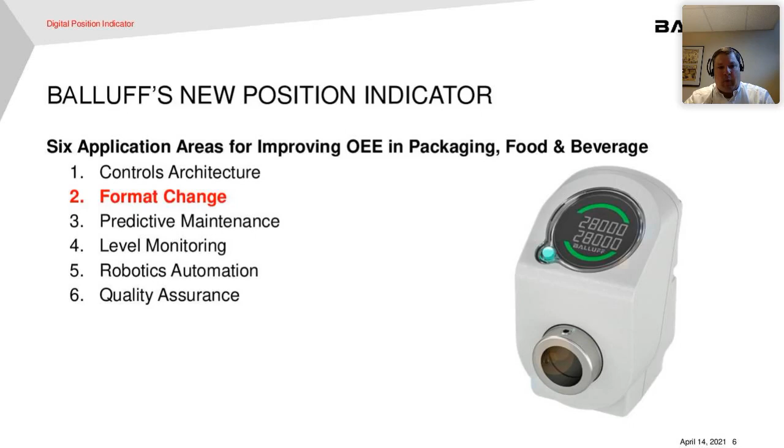In the packaging world, changeover has a lot to do with varying package sizes. So if you imagine you're changing from the big family size jug to a small 8-ounce bottle, there's going to be a bunch of guide rails and different things that need to be changed and moved. That's where we help customers. Whenever we go out and have this conversation about our six application areas, usually format change garners the most interest with customers.

I just clicked on the poll, and 80% of the respondents said that they're using a manual format change system, and that's pretty common with what we hear.

The reason it's been so interesting in these conversations with customers is because there are some trends in the industry driving the need to automate. Customers, or consumers, are really demanding more options. They want more package sizes, more personalization. One of the things we hear about a lot is lot size one. It's really driving manufacturers to have to do more changeovers, running more recipes more often, which means more changeover.

There's also an aging workforce. The person who's been operating that machine for 40 years and knows what to do like the back of their hand—those people are leaving with increasing frequency. They're being replaced by often younger, more digitally inclined people who need to be brought up to speed quickly, and automation provides an opportunity to do that.

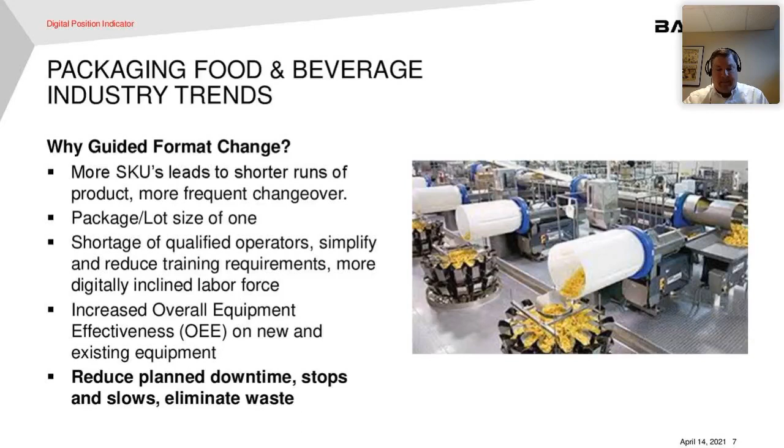Just like in any industry, people are looking to reduce downtime, increase OEE. They're looking for greater efficiency in their plants, not only from new equipment but also from existing machines. So there's this desire for automated changeover.

When people think about automating changeover, they envision changing a recipe on the HMI—you press a button and motors move everything into place. That's a really great solution, but it can be costly, and it can be hard to implement on a machine retrofit.

We often encounter customers, just like we see here, looking to improve a manual situation where they're using unconnected rotary counters, or they have hash marks drawn on the frame of the machine, or they're comparing values with a clipboard and trying to get there manually. And it becomes very mistake prone—there's a lot of opportunity for error.

We have some pictures later of where these opportunities are on the machine, and on machines like cartoners, these adjustments have to be made all over the place. So there's a lot of opportunity for error.

By working with them—Balluff's got a real strength in linear positioning—we provide our customers a measurement device along with visual indication, whether it's on the HMI, or Balluff's got a device called the Smart Light, an indicator light that can provide guidance, and then having IO-Link tie it all together.

We've really been able to help reduce mistakes and reduce the amount of time it takes to do changeover. So now when the operator changes the recipe on the HMI, they still move the devices—the human is still the mover—but the Balluff devices guide them to get to the right position so that it happens more quickly and more precisely.

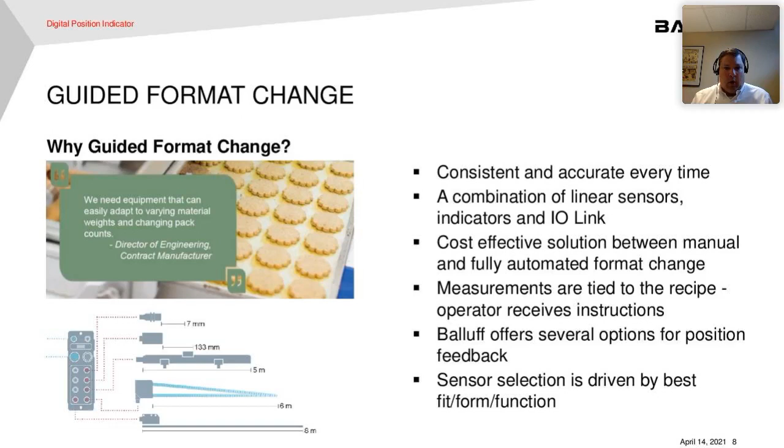For us, it's proven to be a really nice, cost-effective solution between fully manual and fully automated changeover processes. We've been really successful with it, and this is an example of it.

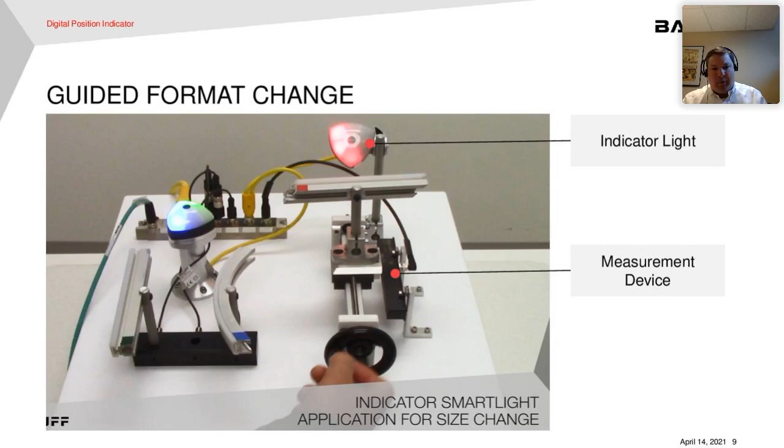We've been successful with it, but customers have been asking us, hey, could you guys get us a digital version of the counter we already use? That's why we're here today. Now we've got it, and we're so excited. It's our version of a digital position indicator. We call it the Balluff Digital Guide, or BDG.

What we have here is a user interface that displays a target and actual value, showing where they're at right now and what they need to get to based on the recipe change. We've got a rotating LED that spins in the direction they need to spin the wheel, then changes color to validate when they get into the target position. If they blow past it, it starts rotating the other way to tell them to go back.

It doesn't run on battery. Power and signal comes over IO Link, but it does have a battery buffer so it can hold position through shutdowns and power cycles. So it's got absolute position. It doesn't have to rehome.

One of the really cool things about this is it's IP69K. That is an industry only for Balluff. We're the only ones with this form factor that has IP69K, full washdown. And then we've got some embedded condition monitoring features, not only for the health of this device, but also that can be used to monitor the health of the machine. We'll get into that a little bit later.

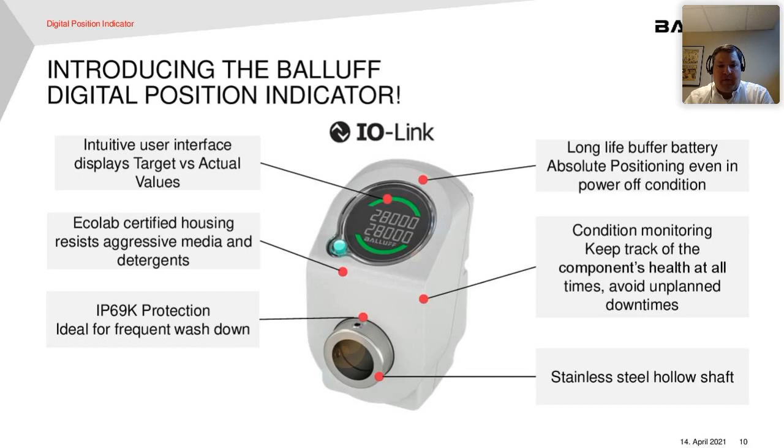This really gives us another tool in our toolkit to address these changeover applications. I think the interface is unique, and the customers that have seen it so far have really liked it. The IP69K is a really nice feature. And these condition monitoring and smart features really open up more opportunities to reduce downtime for our customers.

In my opinion, it's Balluff's position and really our expertise with IO Link that sets us apart from the field. We know what we're doing with IO Link. We can provide a full solution. If somebody wants to improve changeover, we can do the whole thing to help them with it. We've been doing it for over a decade. We were part of the original IO Link consortium. We have thousands of successful integrations we can lean on, and the expertise to back it up. So you can feel really confident that Balluff is going to help you be successful with your project.

Just spending a little bit of time on the smart features that are available. The Balluff Digital Guide is part of a new family of products from Balluff called SAMS, which stands for Smart Automation and Monitoring System. SAMS devices have a standard set of condition monitoring parameters, both for the health of the device along with the health of the machine.

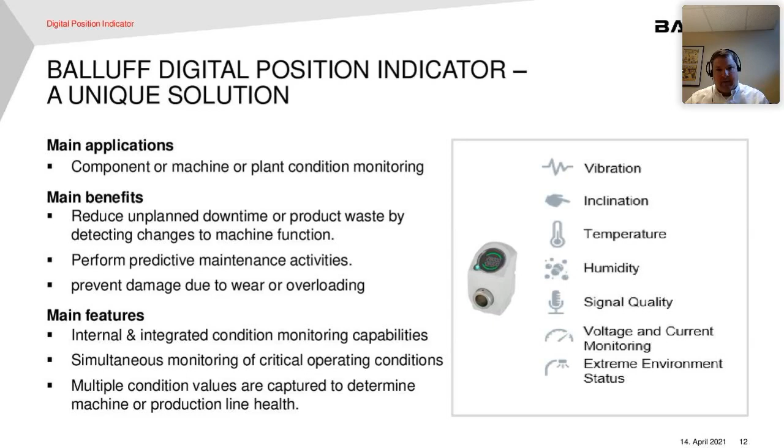These condition monitoring features and this dual functionality—it's an automation device or a sensor, but it can also provide condition monitoring—really take advantage of the full capability of IO Link, which is becoming the driver for Industry 4.0, smart machine, and predictive maintenance initiatives. There's also embedded smart features, and you can see those listed here.

There's some internal logic blocks. I think this is one of the primary things customers have been impressed with so far as we've gotten this out and talked to them about it. The internal logic blocks can compare values and provide outputs, so you don't have to have the PLC handle all that information or know what to do with it.

The example I gave of using this to monitor vibration every once in a while—you can configure the device with a threshold, and if the vibration exceeds that, it will provide an output. One way to do it could be sending that to the PLC, which has to interpret it and be programmed to know what to do with it. Or we could just monitor for that threshold with the internal logic and send an output, and now we do something with that. Those logic blocks have proven to be really interesting and powerful to people we've shown it to.

Another feature people like is this ping function. If a device needs service, or you just want to know where it is and direct an operator or maintenance person to go address that device, you can ping it and it's going to light up with a bright blue LED that's very visible. For this device in particular, I can envision people using it for sequenced changeover—you could ping the device that needs to be changed next, or ping it in order. I think that's going to be a nice feature here as well.

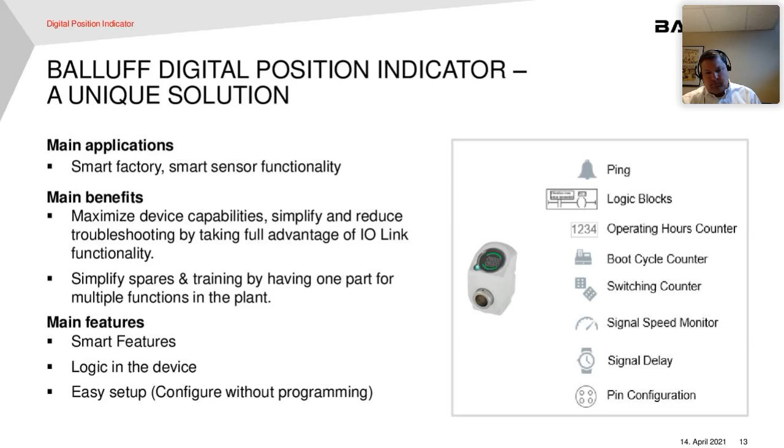So the end result we're really looking for is full smart machine functionality. Devices that have traditionally just been dumb switches can now provide additional data about themselves and about the environment, data that can be acted upon, logged, trended, analyzed. And really what we're aiming for is machines that are easier to operate and maintain with less downtime. That's the end goal.

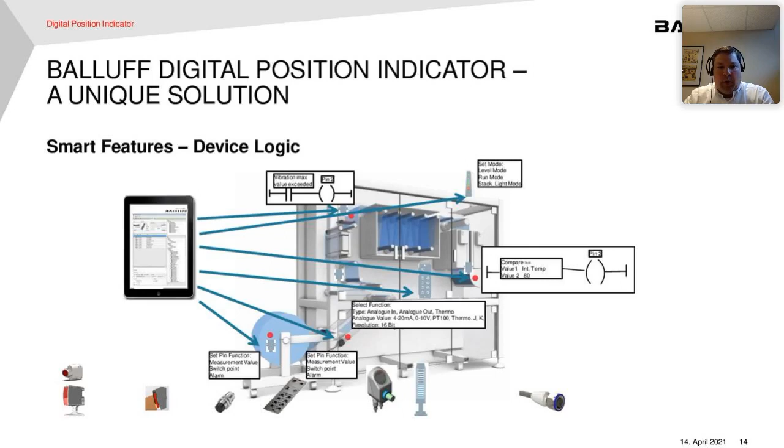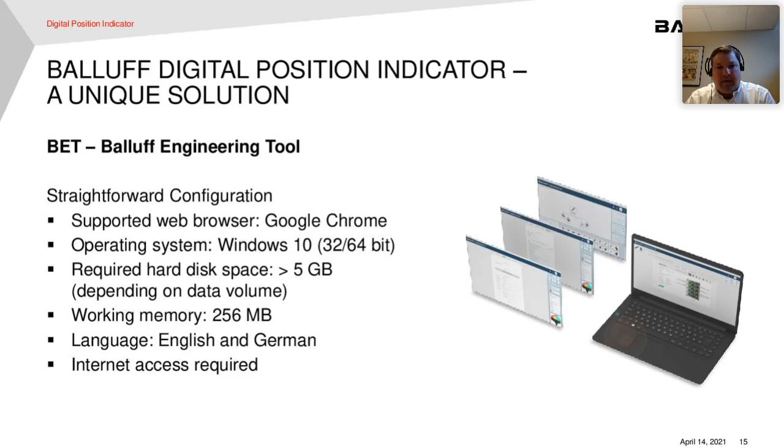We also don't want to make it ridiculously hard. I mean, there's added features, so a natural question for people would be, well, is this going to be a nightmare to program and set up? Part of the SAMS family is what we're calling the Balluff engineering tool. This is a tool that can be used to configure the IO-Link devices on a machine, every IO-Link device on a machine, whether it's a Balluff device or not. We're demoing this now. If you're interested, let us know. But it really simplifies the configuration of the devices to make it easier on the people that have to program and set up a machine.

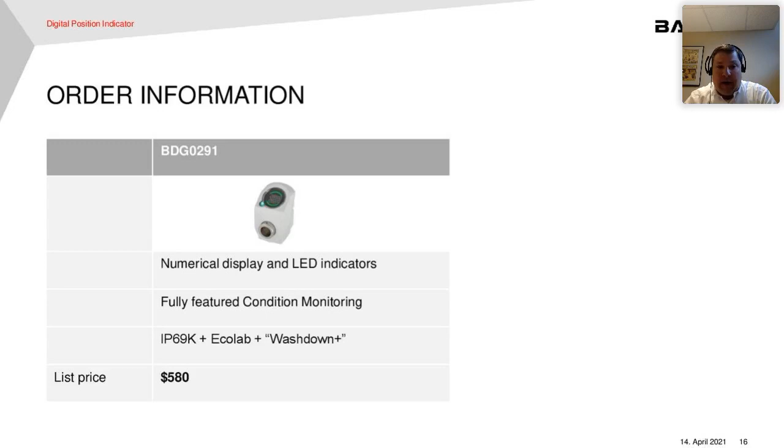Here's the nuts and bolts. Everybody always wants to know how much something costs. So the MSRP in the US here is $580, and that's for this fully featured version. Later this year, we're going to come out with another option that doesn't have the numerical indication, but that's a ways off. This is what we have, and it's available and ready to go today. So BDG 0291, we're ready to go.

We've got some accessories that you'll see on the one pager or the sell sheet. So we've got a reducing sleeve to accommodate a different hollow shaft size. It comes out of the box with 20 millimeters, and we're showing a 5 meter cable option for both washdown and standard applications. We've got all different cable lengths in both those types of configurations.

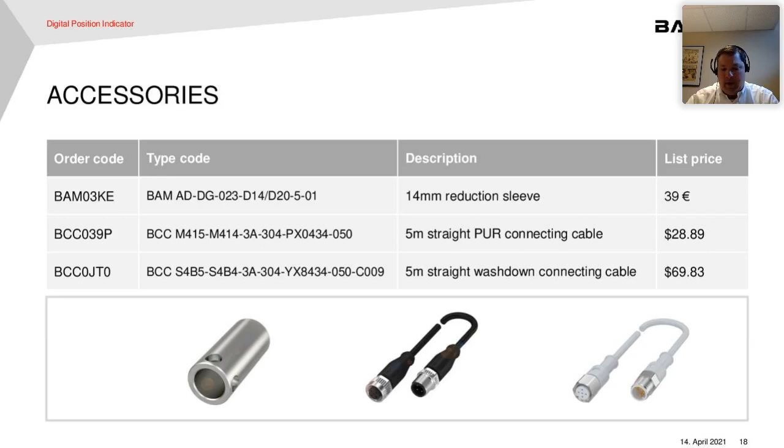It's not really an accessory, but I'd be remiss if I didn't mention, I'll say it again, Balluff's awesome with IO-Link. We know what we're doing, and we have IO-Link masters and a whole world of devices to support a full controls architecture for a setup and a solution. So IO-Link masters as well, we can help there.

So where can you use these? You can use a BDG anywhere you've got a manual position adjustment, or really if you want to, you might have a digital version and you want to take advantage of the functionality of IO-Link, another great opportunity for you. But by digitalizing this process and providing the user with indication, you're going to get an ROI from eliminating those errors and spending a lot less time making the changes.

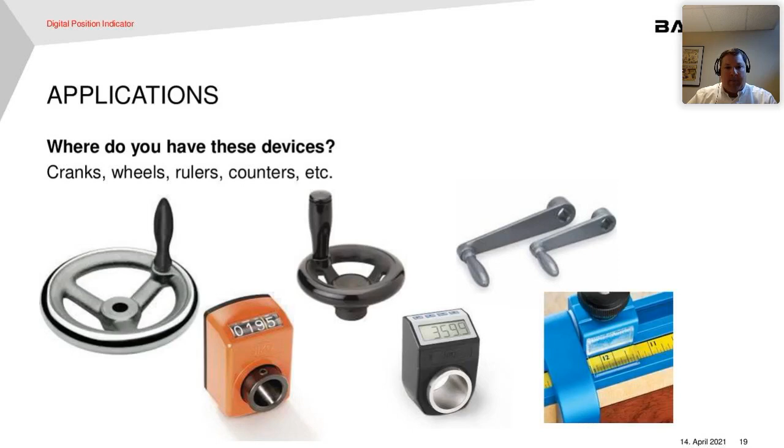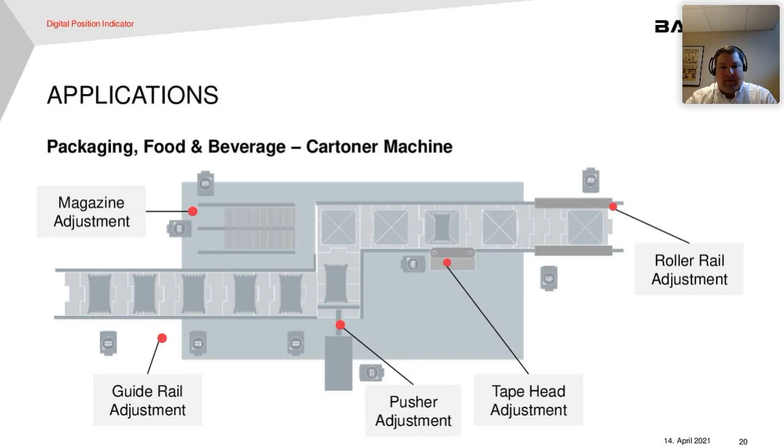Similar to a case erector, case packer, some of the same, a magazine, tape head, what have you, guide rails, they're all over the place on these machines. So in secondary packaging, they tend to be pretty similar. I'm so excited to see where we're going to end up with primary packaging. Now that we have IP69K, I really think it opens up a world of applications for you. If you have primary packaging applications and you've got manual adjustments that need to be made, maybe you never would have considered using a connected device like this, and now you have the opportunity to do so.

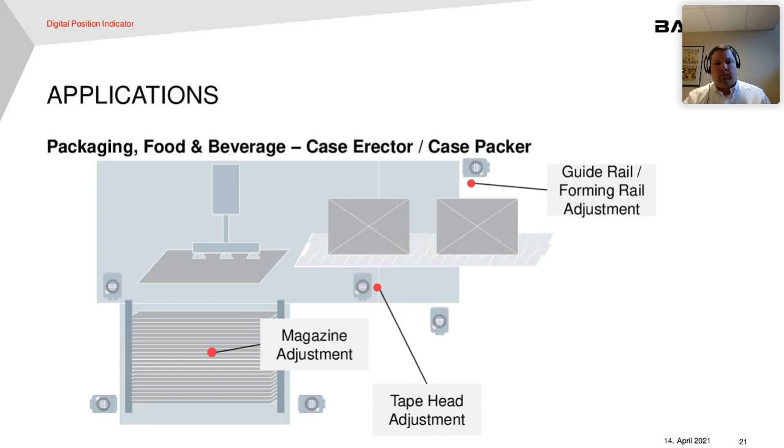Outside of the packaging world, and I did see a couple of company names from outside the world of packaging, so welcome and thank you. They're all over the place too. Here's an example from the automotive world and metal stamping. So you can see these guys were using a measuring scale and a magic marker on an in-feed application. So anywhere you've got these manual position adjustments, there's an opportunity to digitalize the process.

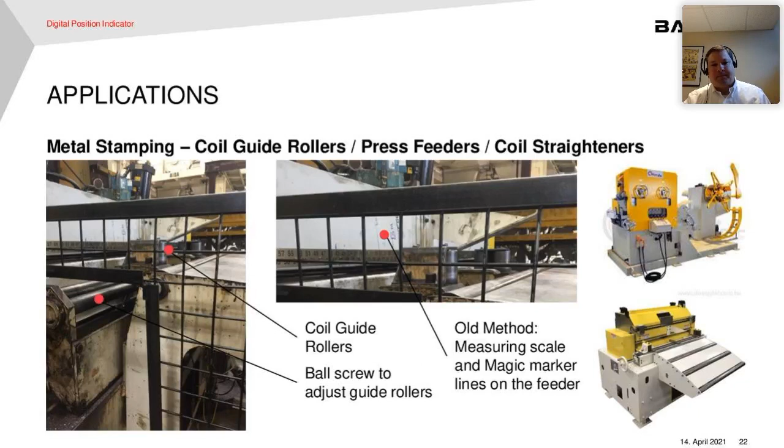I mentioned we've been successful. Case studies available. We worked with a customer who was able to capture and document a 65% reduction in the time it takes to do their changeover. That's really powerful stuff. And oftentimes when we're talking about changeover, we're talking about planned downtime. So if you can reduce planned downtime, you're really talking about increasing capacity or building capacity back into that plant just by digitalizing a process like this. It's really powerful. We know there's an ROI, and we're excited to work with you on it.

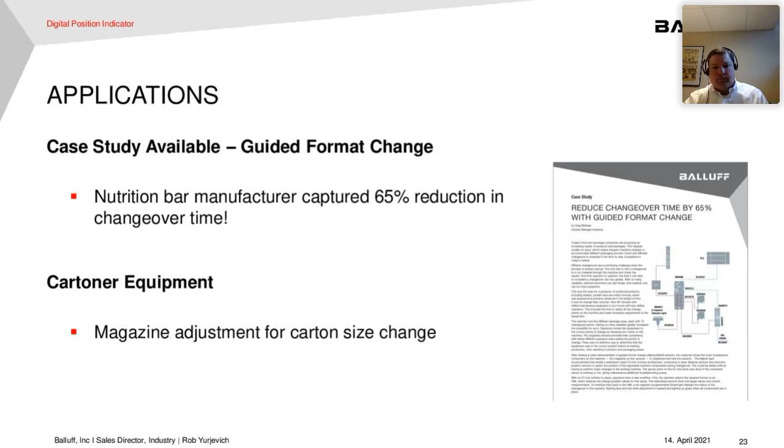So that's the introduction today. I think next steps, you know, I've mentioned it 100 times, we're eager to get out and work with you on it. So you can reach out to me, my contact information is going to be put up here soon. You can reach out to your Balluff salesperson, but we're excited to get out and demo these things or do a virtual demo like this to dive in more technically, to talk about a full solution or what the architecture would look like, to help you figure out what an ROI might look like on your application. Or just if you want more information about what you saw here today, we can send you some of the documentation.